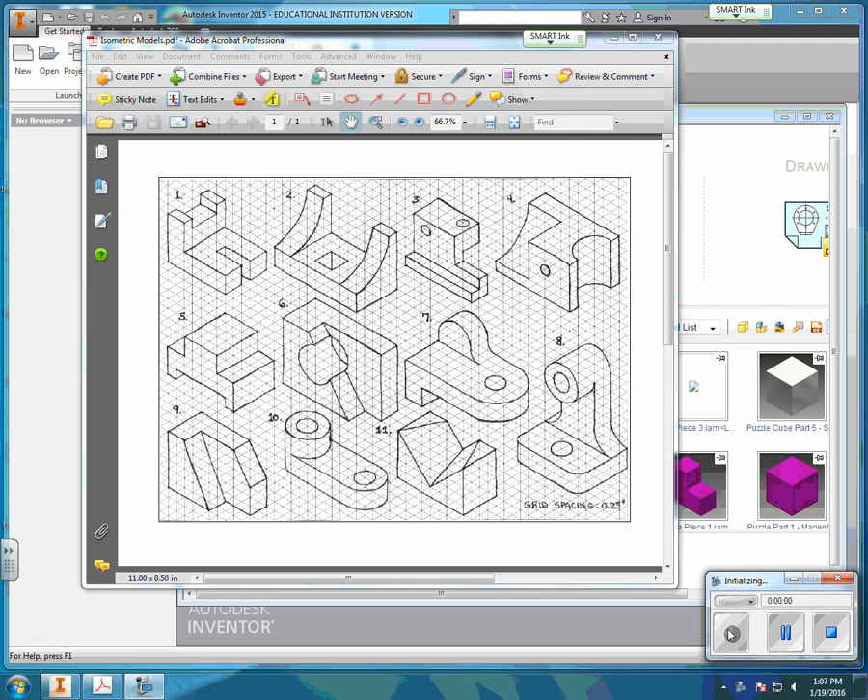For this tutorial, we'll be working on isometric model 11. It is right here, let me zoom in for you. Right there, and there's model 11. What we're going to see from model 11 is that it looks like a block with a triangle that is cut out from it.

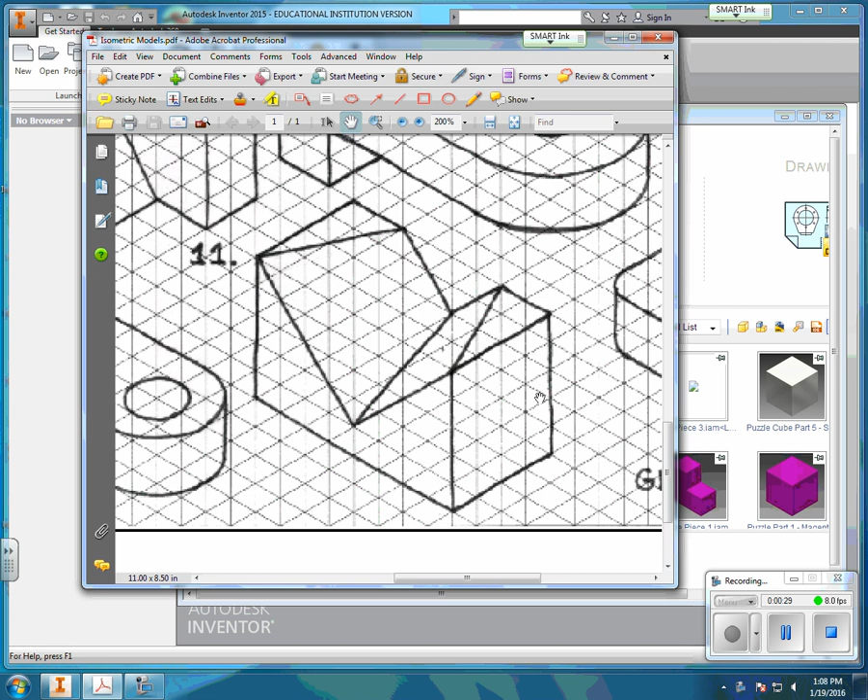So it looks like we should be able to do a subtractive modeling method with this part, and I'll show you how to do that on Inventor. So we'll start by creating a new part.

Now once the part has opened, I'm going to go ahead and start a 2D sketch, and here I'm going to start it on the XY plane. That way I'm going to take the front of that isometric model and sketch that out.

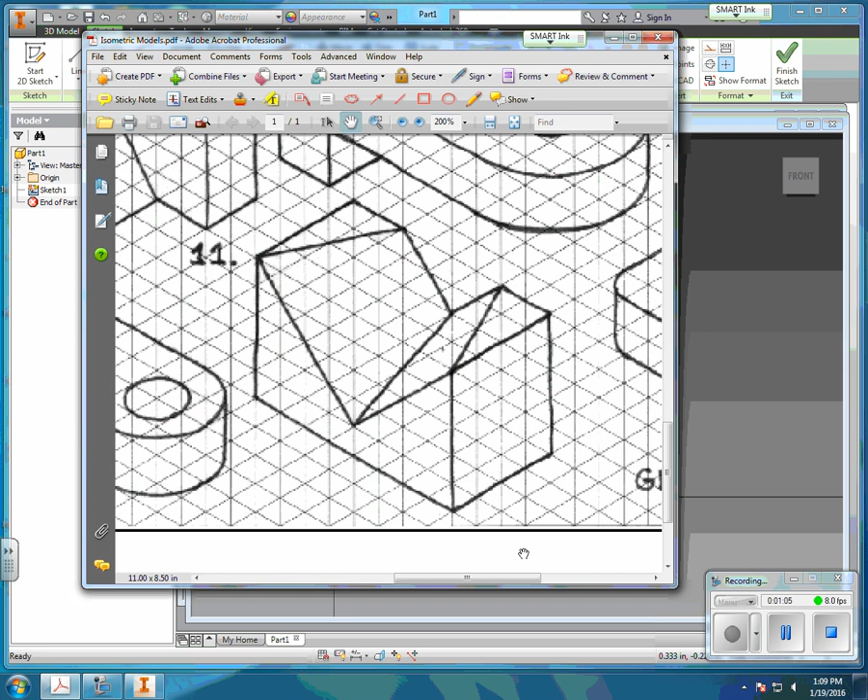So once I get that, I'm going to go back to my part. What I can see from the front of this isometric model is that I have a block. If I count the amount of spaces, it looks like there's 8 spaces. My grid space is at 0.25 per grid space, that would give me a length of 2. And the height has 5 grid spaces, so that would be 1.25.

So I'm going to go back here, create a rectangle, lock it at my 0, 0, and I can just go ahead and drop that. I'm going to use my dimension tool to constrain it. Click on this line and I am going to dimension that to 2, as we had discovered on that drawing, and my height is going to be 1.25.

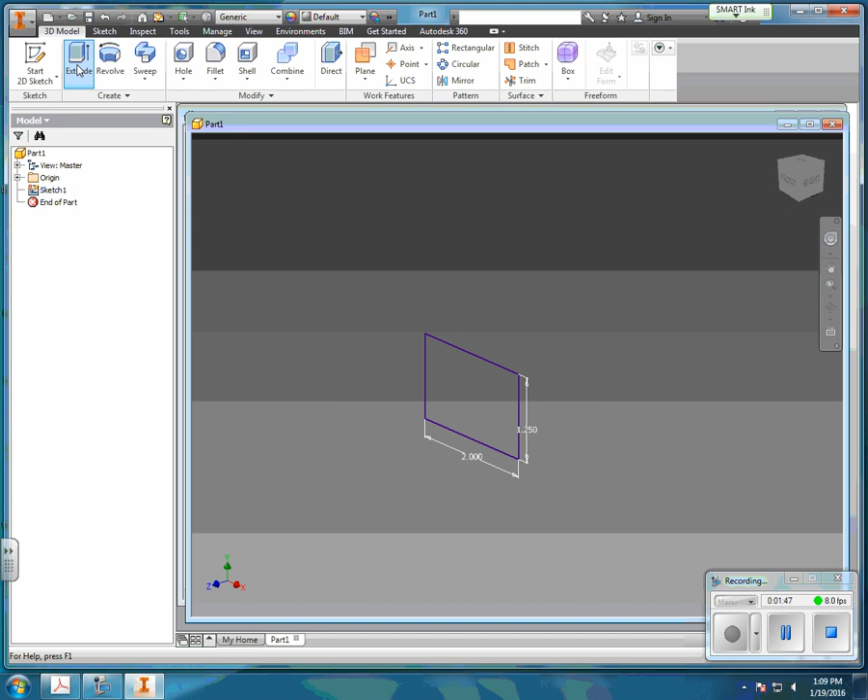After I'm done with this, I'm going to finish my sketch. Then I'm going to hit the extrude feature and click on it. For me, I like to bring the direction towards the back, but you can choose forward, back, or in between. I just have a personal preference to bring it to the back.

Now looking at my drawing, it looks like my depth is at 1. So lucky for us, it's already default at 1. If yours is not default at 1, go ahead and type that in and hit OK.

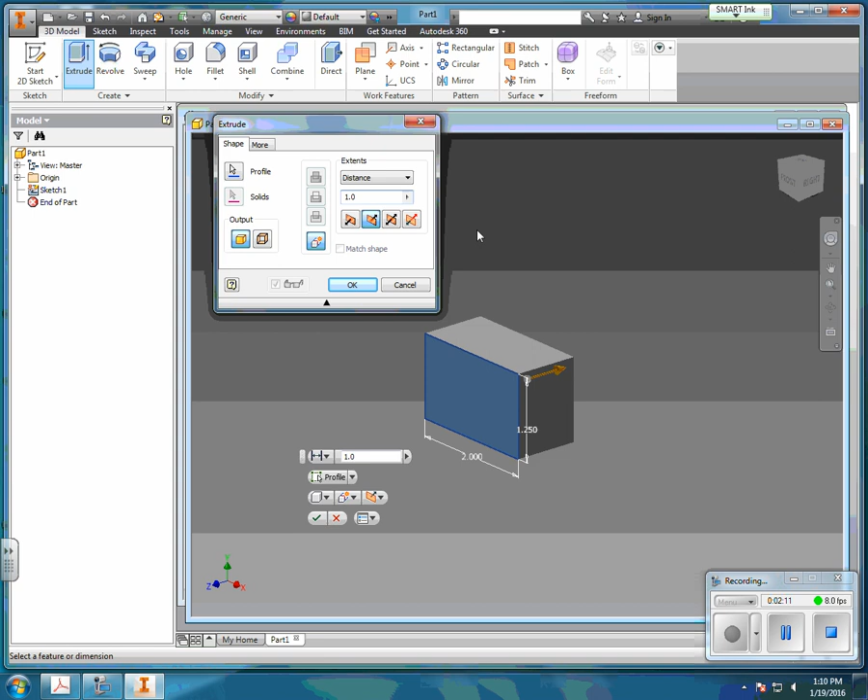Now I have the block, but I also have those 2 triangles that need to be cut out. Normally what I would do, if it was the same size triangle cut through, we could do an extrude feature, but because the triangles are different sizes, we're going to be using a new feature called loft. I'll show you how to do that.

I'm going to look at my front part of the shape. I'm going to create a 2D sketch on the front. Now what I'm going to do is create this triangle. Let's see if you can see that. So it looks like if I connect from here to here and drop the triangle down, I will have a triangle on the front view.

So I am going to go ahead and first create that line at top, draw this part of the triangle, and try to line it up to the midpoint of this line. So you see here I have created a triangle, but what I need to do is constrain these lines, and I can do that through the dimension feature. So I'm going to go back to the drawing, and we'll see that...

The point of this triangle is at 0.25 away from this edge. So I'm going to lock that in, click on here, dimension this, 0.25 - it's already dimensioned there. You notice how my lines turned blue. So I'm going to go from the edge.

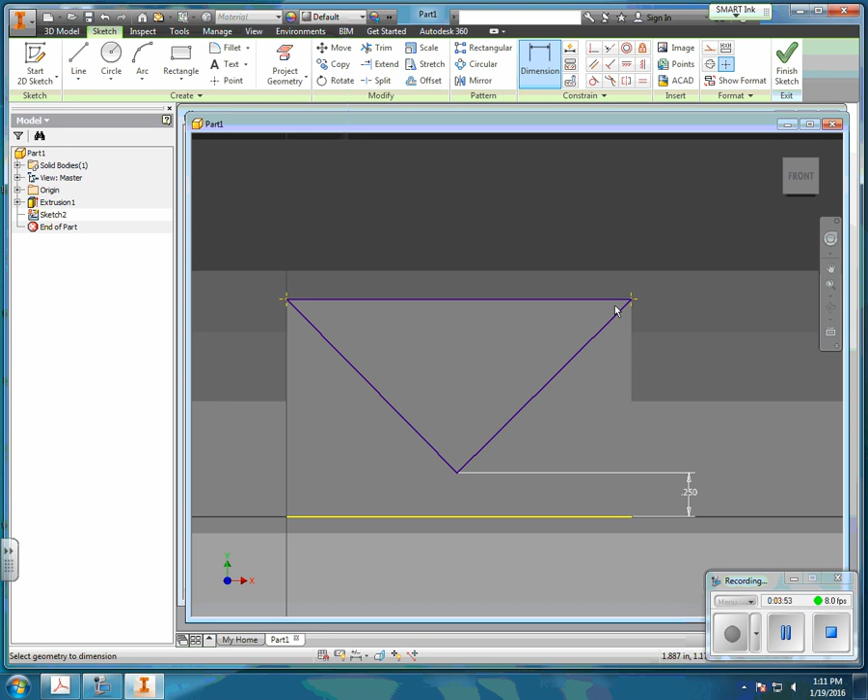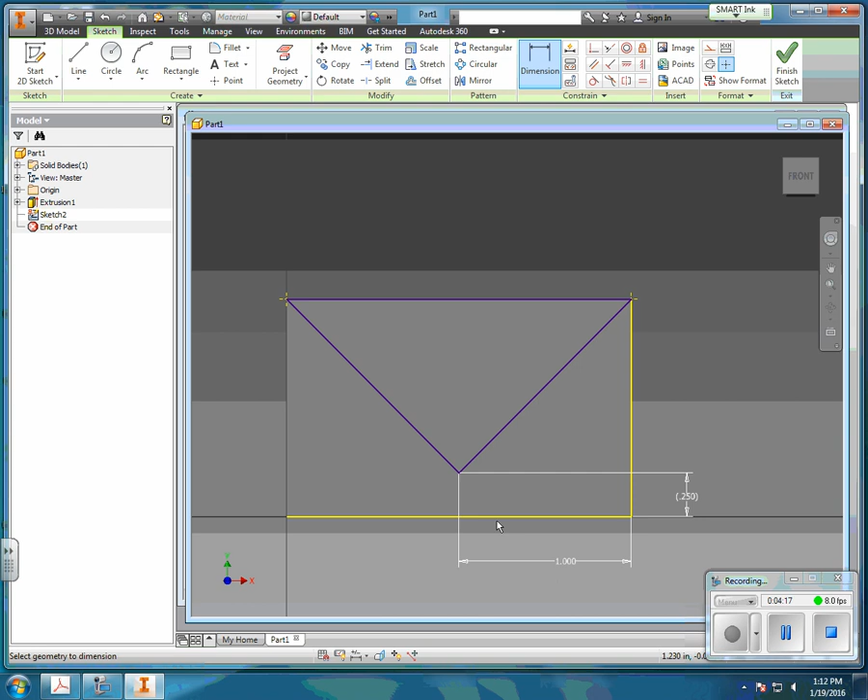I'm going to make sure that I locked this, and I didn't. I want to make sure I locked it to the center, and for some reason it is not letting me lock that. So let me go ahead and lock that at 1, and I'll center it. Here it looks like what I had to do was delete that dimension because it didn't dimension it, and lock it at 1 away from the edge and 0.25 away from the bottom line. If you have issues with dimensioning yours, you could go ahead and delete the dimension as you saw that I did and redimension it to get these constrained.

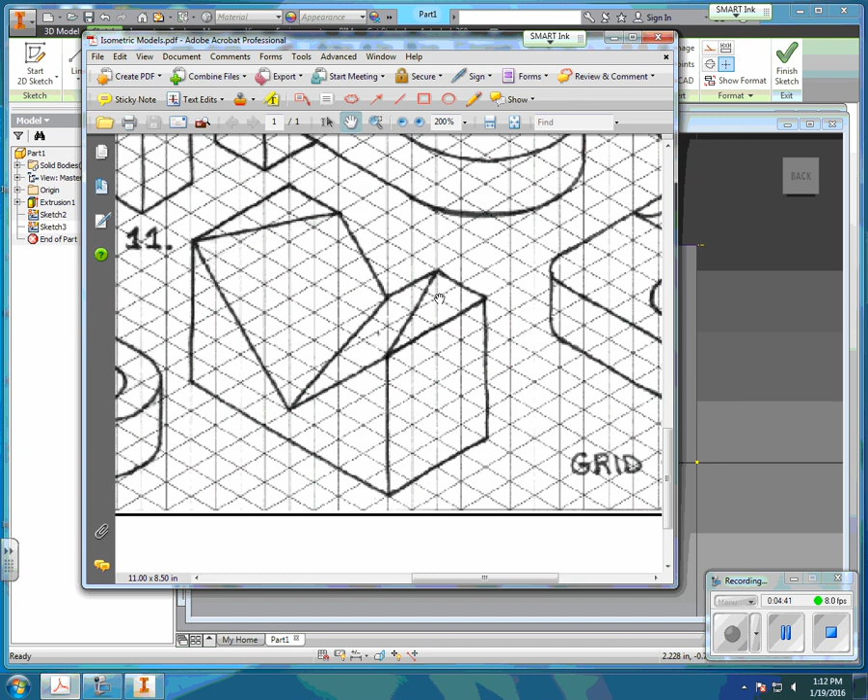When I'm done with this, I'm going to finish sketch. Now what I'm going to do is sketch on the back of this block, and this time I'm going to sketch this little triangle here. So I'm going to go ahead and draw.

Now the triangle doesn't end at the corner, it actually comes a little bit to the edge. I'll try to lock that towards the center, but it does go a little higher, so I'm going to go there and close my triangle. Not worried that it's not even, because I can always come in and dimension and constrain that.

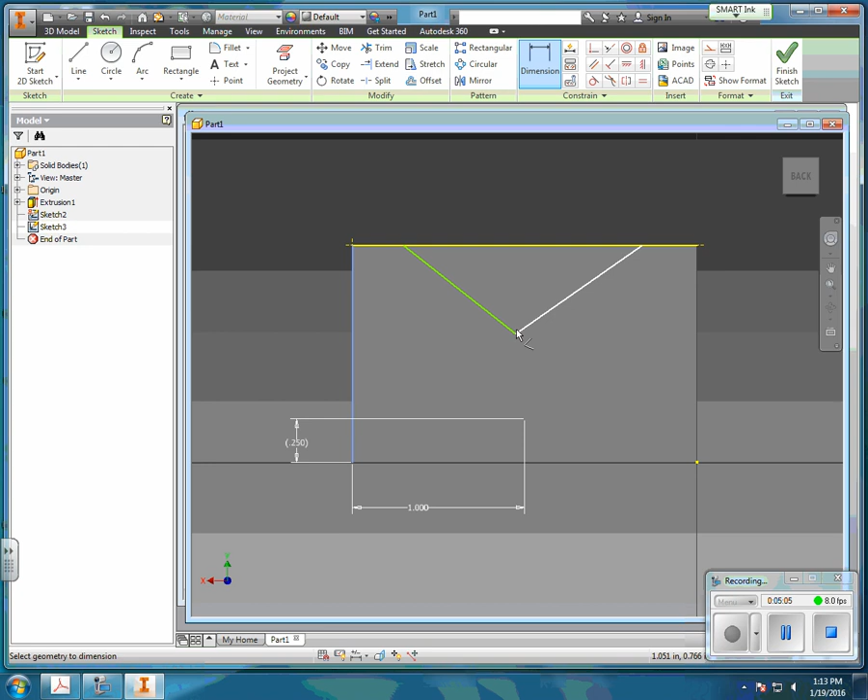So I'm going to constrain that. Again, it's at the midpoint, so I'm going to lock that at 1. I also can tell from my drawing that this is at 0.5 from the edge. So I'm going to dimension this to here, which is going to be 0.5. You'll see that my line has shifted. Here is 0.5, the line has shifted.

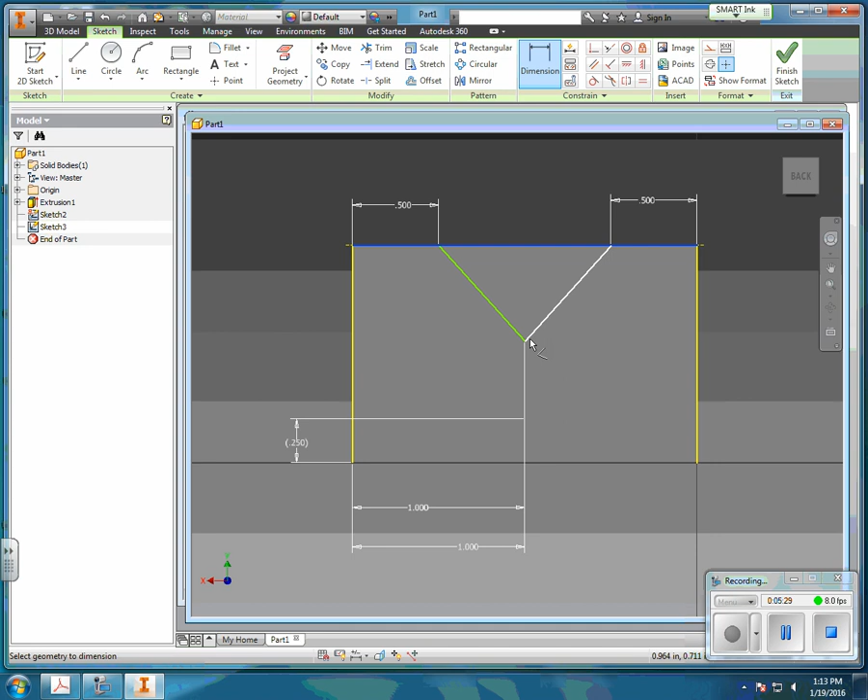And now I just need to constrain this distance, which I have to revisit to see that it is 0.5 from the top. Right now it gives me 0.5509699. Just go ahead and constrain that to 0.5.

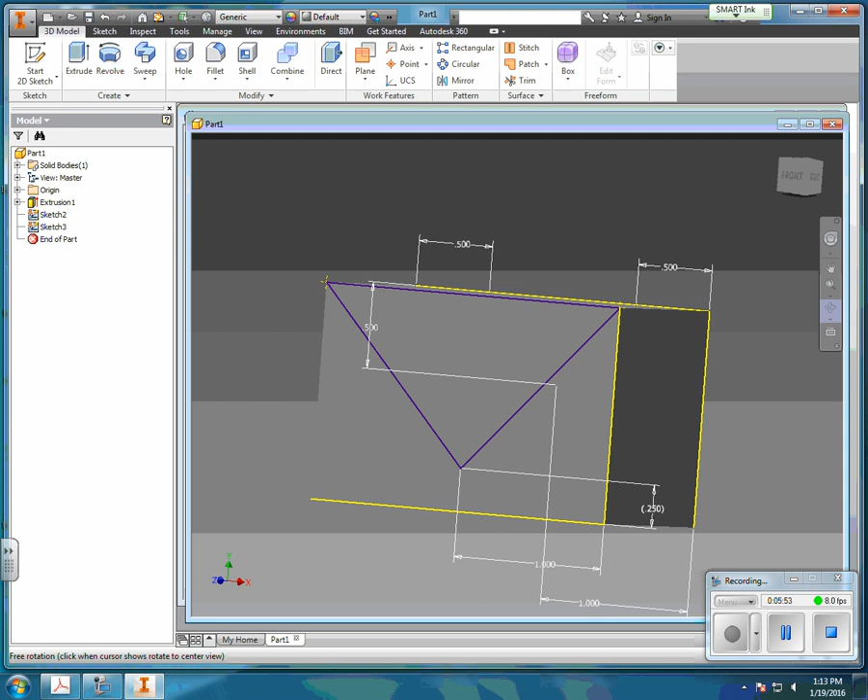Once I've completed that, I have 2 sketches and no 3D command. So this is where we're going to tell Inventor to loft these 2 sketches. I'm going to go up to Sweep, that's where the loft feature is hidden. Go to Sweep, and I'm going to click to add.

Click on Sketch 2, and I'm going to make sure that I clicked on the triangle. It'll highlight it - you don't want the other part, you want the triangle. I'm going to go to Click to Add and hit Sketch 3. Again, I want to highlight the triangle. It looks like it automatically did it for me.

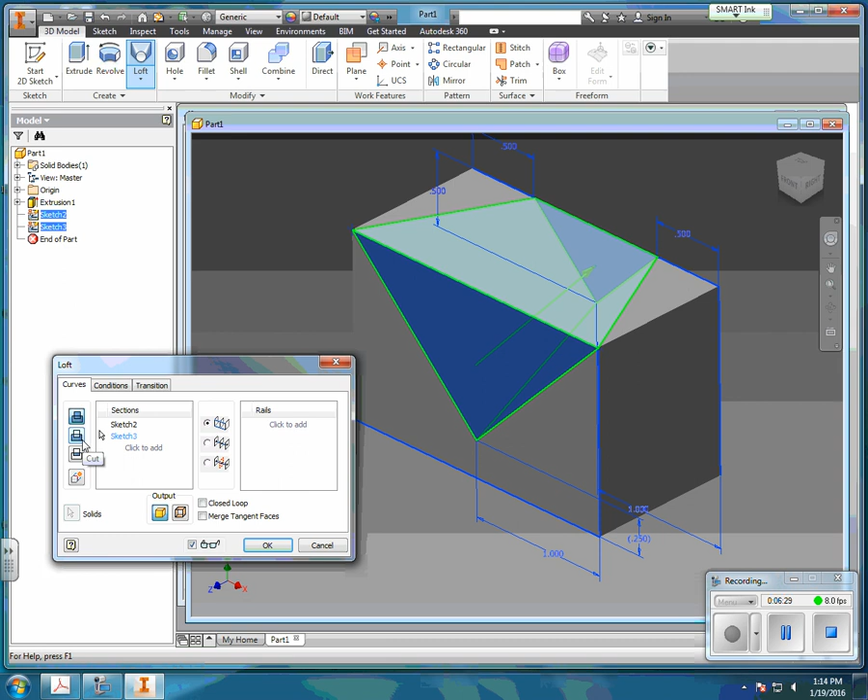Then I'm going to go to, let's see, Loft Cut. So Loft Join actually lets you make the part if it were 2 different shapes, but what we want to do is subtract that part away from it. So I'm going to hit OK. And there you go, there's your shape.

Let's go to the front, isometric view. And here's your part number, isometric model number 11.